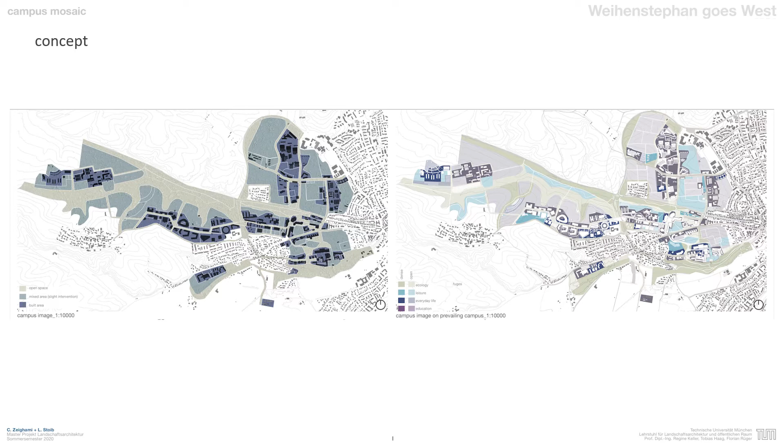It shows a clear hierarchy. There are areas with high structural development potential on topography heights, here in purple, mixed areas for light interventions, turquoise, and open space that must be kept free, here in green.

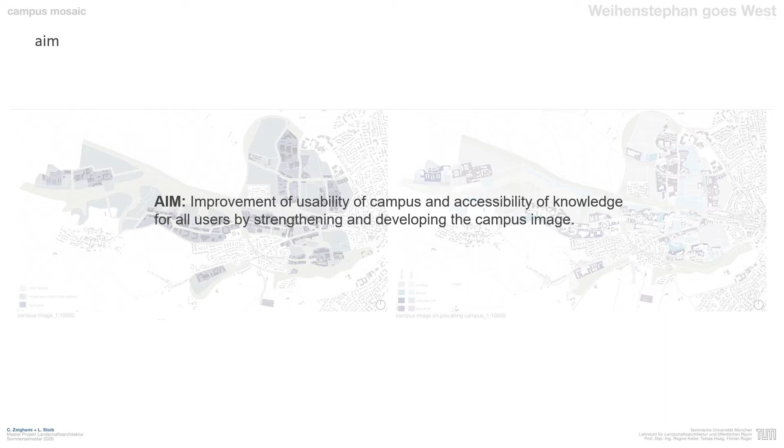Our aim is to improve the usability of the campus and the accessibility of knowledge for all users by establishing multiple use areas. Therefore, we want to strengthen the identity of the green campus as well as the micro-identities of the individual institute areas. To achieve and strengthen the campus image in detail, we work with thematic areas in the form of mosaic stones.

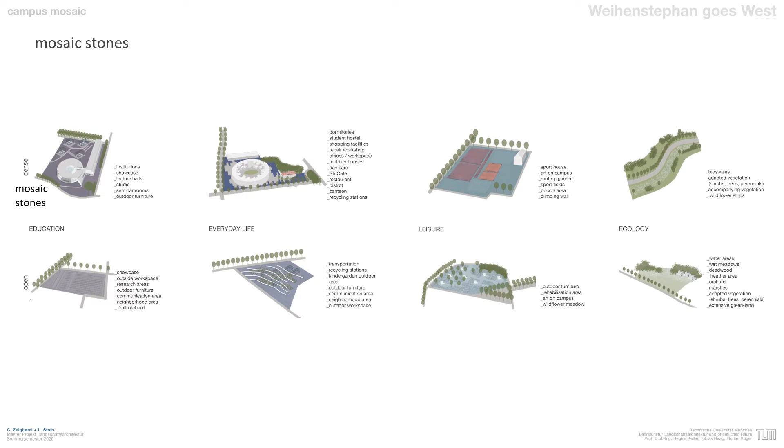The thematic areas are education, everyday life, leisure, and ecology. The emphasis is on education, as this is the most identity-forming theme on campus and it should be made accessible to everyone. By strengthening and adding the other themes, everyday life, leisure, and ecology, on campus, the usability for all users will be further improved.

To strengthen the green campus identity, a green grid will be established as the holding structure of the campus. The individual mosaic stones are held in place by fuges. These are, on one hand, guiding elements, a combination of path and tree avenues and rows, and on the other hand, nodes in the form of plazas combined with groups of trees. These are located between the individual mosaic stones and at the same time form a mobility network with important nodes on the entire campus.

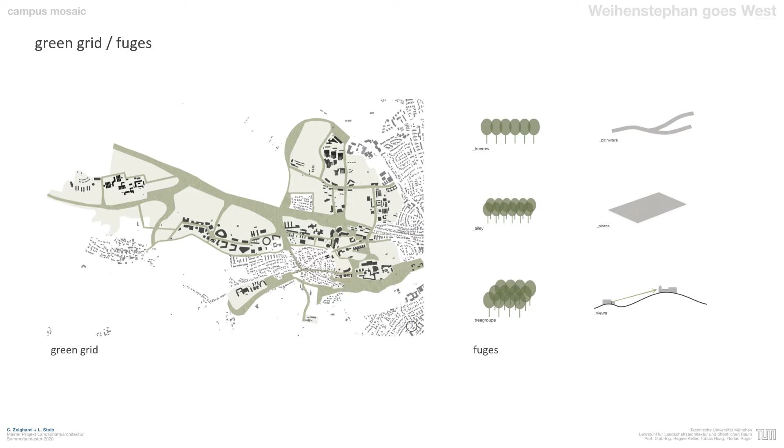The campus image as the basis for the Western Campus expansion, and the use of our building set with mosaic stones and fuges, resulted in this master plan.

The concept of mosaic stones creates a better structure and at the same time a densification of the existing campus. Existing thematic areas could be strengthened and missing structural elements could be added. The existing main axis of the campus will be extended to the west up to Dürnast, following the heights and the prevailing building axis. The building structures of the campus extension are oriented along this main road.

The establishment of ecology stones extends and strengthens the existing green structures and better integrates Dürnast as a part of the campus into the structural image. Dürnast will also be expanded with everyday life stones due to its high location, to prevent monofunctional use. Here, living space for students and young families will be created.

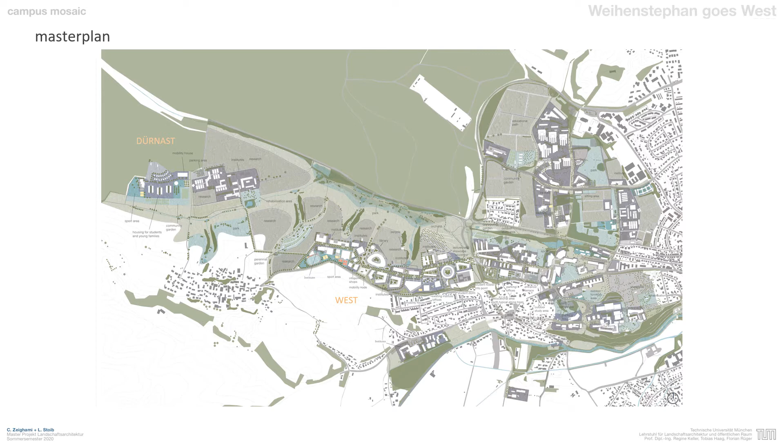The green network has been strengthened by the establishment of green corridors. At the same time, the definition of ecologically valuable areas, such as extensively used meadows and wetlands, allowed important lines of sight to be preserved.

The overview plan of the built-up areas shows a clear structure of the build-up heights and a fixed structure of the building volumes oriented on a main axis.

Furthermore, the transport system was improved. The campus is now connected by several bus routes. The main axis and the extension of the road network now allow a fast connection with the bike. The further fuges between the individual thematic areas of the mosaic enable better accessibility to individual campus structures.

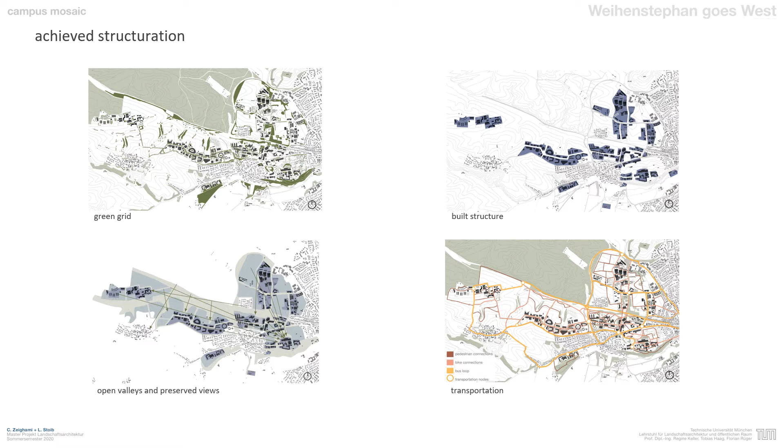Construction Phase 1 will structure the campus for the next 5 years with the applied design and prepare the building pits for Phase 2. The western node will be developed over the next 10 years. The completion of Phase 2 is the beginning of the Campus West sub-area.

Phase 3 will start within the next 15 years. A further mobility node will be established, and extensively used meadows as well as the green structure will be extended, integrating Dürnast completely. In Phase 4, Dürnast will be further structured.

Education will be expanded with the everyday life structures. Phase 5 will be the completion of the Campus West sub-area and could happen in 30 years if needed.

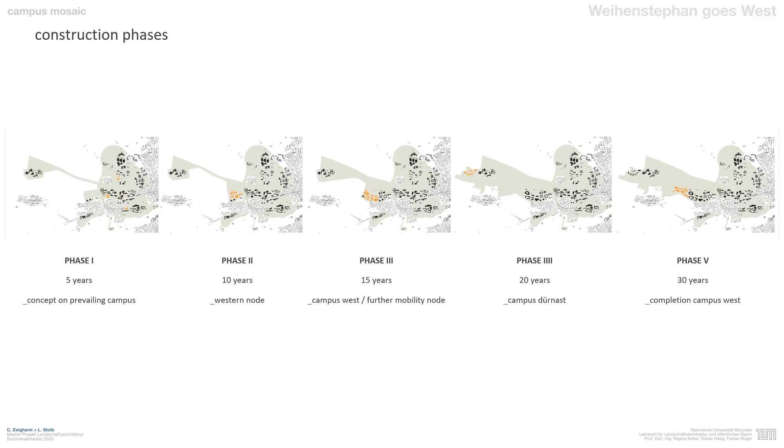The connection between the old campus and Campus West is achieved via a mobility node. A new bus stop is integrated, and the transition of the main road with the pavement change makes this clear.

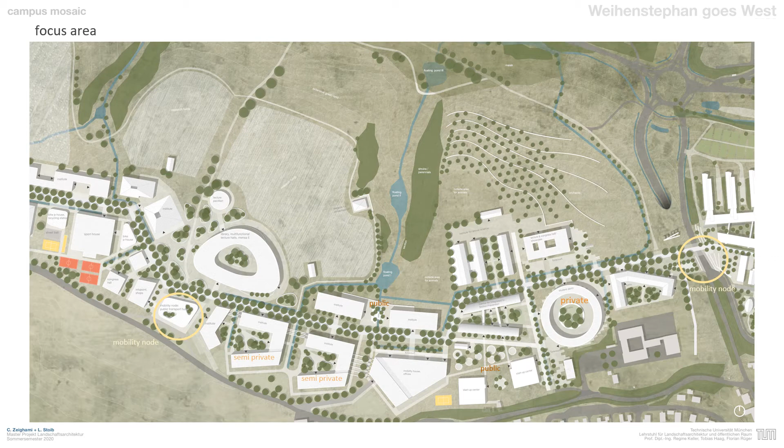Areas in the valley will be converted into extensive and wetland areas. Research areas will be placed in the areas between the open valley and the built area on heights. The dense vegetation along the Hohenbachernstraße is continued with a tree avenue and is thus part of the green grid. It serves as a support of the campus and as a green buffer to the adjacent settlement.

A new large-scale public structure is the Apple Terraces as a social meeting place. Among other things, the apple orchard is a place to stay, learn, play, or relax. In autumn, large harvesting events are planned here. The new water areas are an extension of the areas in Thalhauser Graben.

The main axis, which runs from the existing campus to the west side, is a guiding element through the campus. It acts as a backbone that supports the new campus structure to the west. In order to get a feeling for the flow of the built-up areas to the open spaces and their communication areas, we made a sectional view of a location marked in the land use plan.

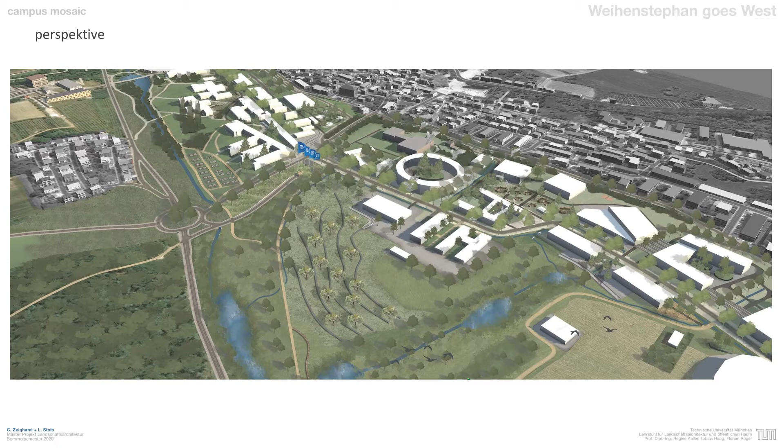Obvious communication spaces on campus are lecture halls, seminar rooms, workrooms, and offices. The exchange with colleagues usually begins on the way there. Thus, a plaza, a path, or a neighborhood room also becomes a decisive communication space.

With the help of outdoor furniture and workspaces with outdoor areas, we create an open and flexible environment for the exchange of information. One example of this is the broad terraced steps between the mobility house and the institute building. Here you will find flexible seating over a large area with a water-bound path ceiling and integrated seating steps.

Next to the main avenue are bioswales. They serve as an accompanying element and collect rainwater at the same time, but more on this later. The wooden terrace with integrated seating elements serves as a large communication platform. The combination of the wooden deck with the bioswale also provides a cooling function after rainfall.

The adjacent outdoor area of the institute buildings offers a good view of the sedimentation ponds and the open space of the Institute of Animal Science. In the area of the integrated ecologically valuable areas such as the sedimentation pond, there are opportunities for future education in the form of knowledge boards and adventure playgrounds.

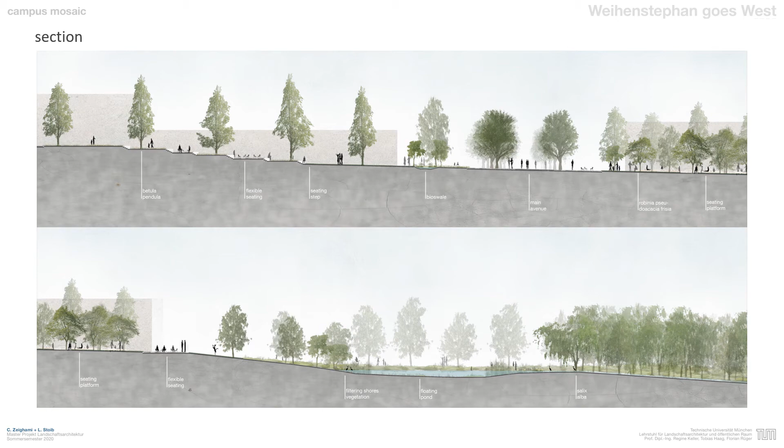The water areas to be seen here are bioswales. The shallow depressions accompany the main road, collecting rainwater from the surfaces and transferring it to sedimentation ponds, which filter the water and then return it to the natural water cycle.

Further public areas are the study nests. Here you can sit in a round area slightly shielded from the surroundings by willows. The slightly permeable greenery creates a calm atmosphere with connection to the surroundings. As electricity and internet is available at the nests, it can also be used as an outdoor work area.

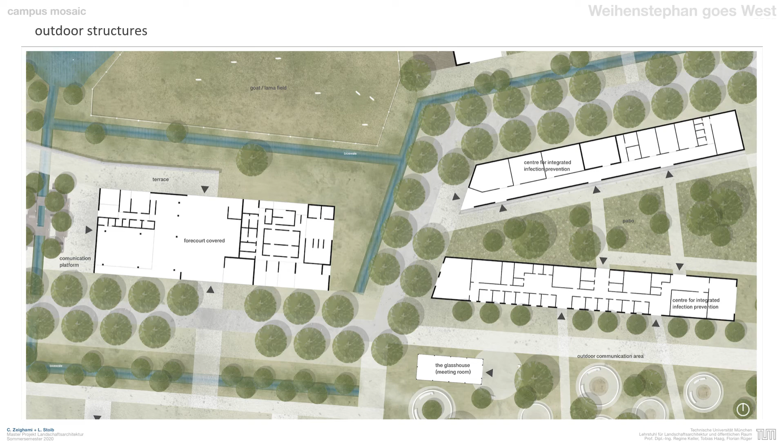The existing glass house, where the Gründerzentrum will be integrated, will be converted into a meeting room. Between the institute buildings of the center, the integrated infection prevention patio is a green area for free use. Stairs in front of the north building serve as seating.

To reinforce the green image of the campus, ecologically valuable vegetation structures will also be adapted to the buildings. Green roofs are temperature regulating and can store a certain amount of water. This is of great importance as we have to expect heavy rainfall in the future.

The new buildings with flat roofs being built on the campus will therefore have green roofs. They will also provide another habitat for insects and plants. Greenery on facades regulates the microclimate between buildings, helping to keep the spaces between buildings cool and create a generally pleasant climate on the entire campus. The greening of the facades also leads to noise and air regulation.

The use of tree species is based on the existing tree species on the campus and will be used in sustainable locations. Along the main road and nearby bioswales, Alnus incana is used. These store a large amount of CO2 over a long period of time and bind road dust. On hot days, they provide shade, which improves the water quality in streams and makes it easier to use the main road as well as other pathways.

Bioswales are both an important accompanying element of our main road and a transitional element into the open spaces. The bioswales are an ecological enrichment of the campus. The use of water as a resource and open waterways are of great ecological benefit. With the integration of bioswales, habitats for animals such as birds, smaller mammals, insects, and amphibians will be created.

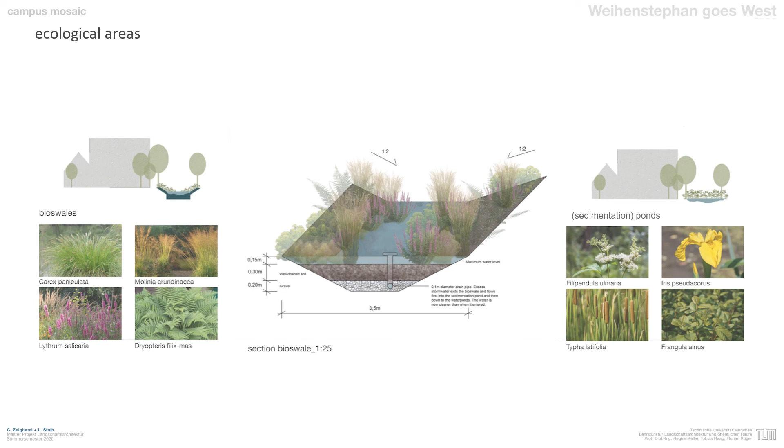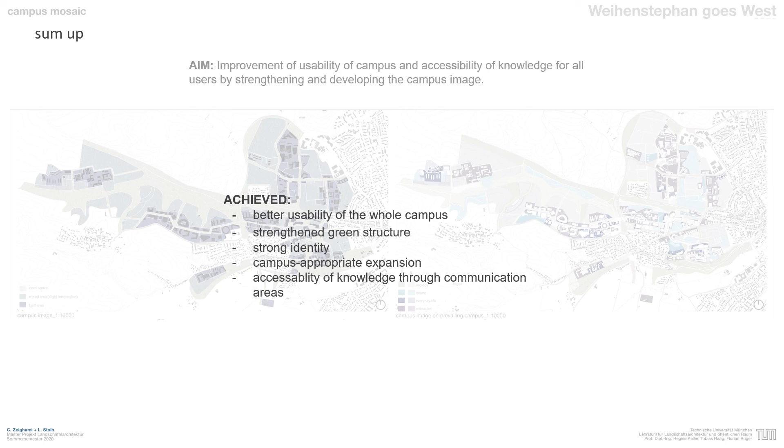We have achieved our goal of making the campus and its knowledge more accessible for users with the following key points: better usability of the whole campus, strengthened green structure, strong identity, campus-appropriate expansion, and accessibility of knowledge through communication areas.